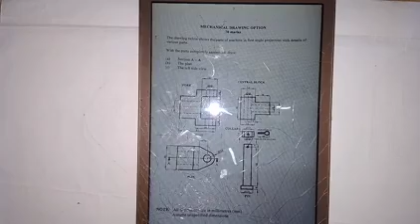As we are told, the drawing below shows the part of a machine in first angle projection with details of various parts. With the part completely assembled, draw question A the section AA, question B the plan, and question C the left side view.

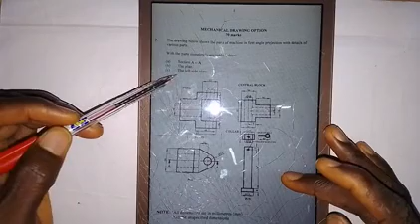So as we are told that these views are given in first angle projection, as indicated here also, this is the front elevation, this is the plan.

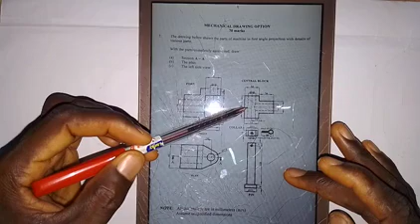Then we are going to take this part, which is called the central block, and put it here. Then we take this pin and insert it here to enter into this one and also enter into this. Then we are going to produce the sectional view, as we are told that we should produce section AA.

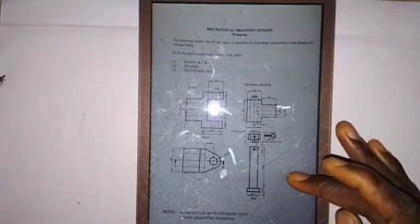So let's go and see how this can be done.

To draw section AA, what we are going to do first is draw a horizontal center line here, on this surface, going in this direction.

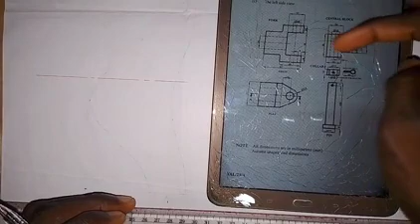Then we are going to be working on this. I need a set square. So we are going to draw this part first, then insert this in it, then put this one.

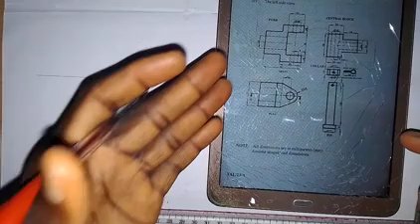Then, as it is a sectional view, there are some parts that we are going to reveal which are hidden in the given view. Because these are orthographic views, when we draw the sectional view, some part will be revealed, which we are going to see as we proceed.

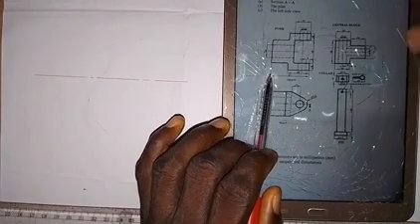Now we are going to draw this part, and then we have the distance from here to this end, which is 82 millimeters. So I will take that, 82, and then the total distance from here up, as we have here.

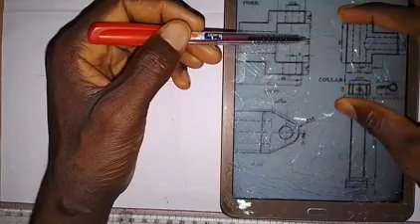So here we have 18, then here we have 58. So 58 and 18. That is what I'm going to do first.

So first I'm going to draw a vertical line at this point like this. Then I'm going to take a measurement of 87 millimeters from here.

So I'm going to draw a vertical line at this point. Having drawn the vertical line, the next thing that I'm going to do is take the 58 that we are given and divide it into 2.

So 58 divided by 2 gives us 29. I will take 29 millimeters up and 29 millimeters down. So this is 29 millimeters down, then I take 29 millimeters up, making it 58. So this is it.

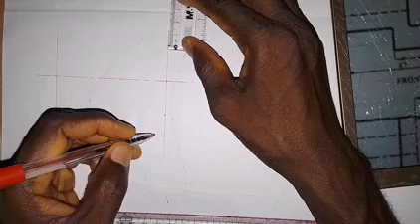Then the next thing I'm going to do is, from this point, take 18 millimeters down. So this is 18 millimeters here. Then I will also come up here, so I need to extend this line, then take 18 millimeters. So that's what we have there.

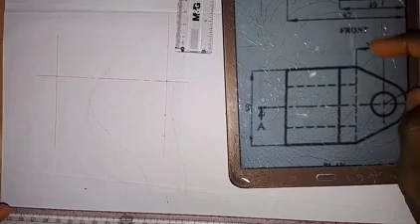Then for this part that we have here, I should be able to bring this out by the time I draw this part, because these lines are together, they are on the same line, so this will come out by the time I get this part. Let's go and see that.

So what I need to do now is draw a horizontal line here, and at this point also, I'm going to draw a horizontal line.

Okay, so it goes forward like this. Here also I will draw a horizontal line at this point, and then here I will also draw a horizontal line. So this goes forward like this. So then the next thing I'm going to do is...

As we have here, the distance from here to here is 49, so we take that 49 millimeters. So this is 49 millimeters. So I'm going to draw a vertical line through this point, like this. Okay, so we take it down like this. So that is what we have there.

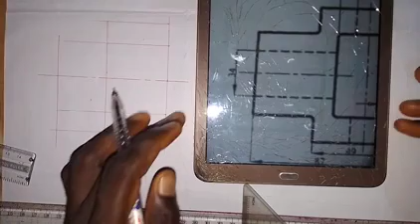So looking at what we have here, this part has come out now. So this is it here, it has come out. Then for this hole, within this part, we have that the diameter of this hole is 34 millimeters. So 34 divided by 2 will give us 17.

So from this center line, I will take 17 millimeters down, so this is 17. And 17 millimeters up to make it 34. So this is it. Okay, so I'm going to draw this line, like this. Okay, so I will also draw it. I'm supposed to draw it to this side, but let me leave it like that.

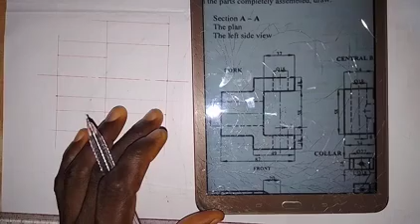So from what we have here, another thing that we have is the distance from here to here, which is 37. So to get this part, we have to take that 37. So from here, I will take 37 millimeters, so this is 37 millimeters here.

I'm going to draw a vertical line through this point. So this is 37 millimeters here. So then we have this, so we have produced this.

So what I need to do now is, we also have a hole here. This hole has a diameter of 18, as I can see here. So this is 18 millimeters diameter. So we have the hole here, and I need to get the center of that hole.

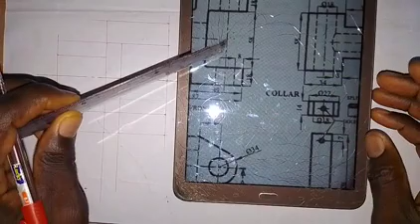For the hole, as we are given here, the distance of this point from this end is 8 millimeters. So I have to come to this point here and take 8 millimeters, so this is 8 millimeters. Then the diameter of the hole is 18, so I take 18 millimeters from here, so this is 18 millimeters.

So half of 18 is 9. To get the center line of that, I'm going to draw a vertical center line through this point first, like this.

Then I'm going to draw this line, and I will draw this line. Then I will come here and also produce this line, and also produce this line. So then this line that we have here has to get to this point. With what we have done here, we are bringing up the sectional view little by little.

Let me tick in the part that I need to tick here for you to see what we have done so far, while I pause the video.

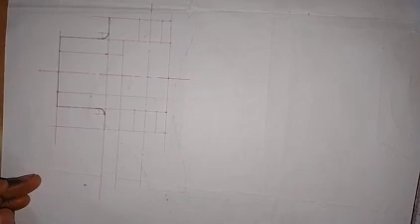Alright, we need to go on and insert the pin, and also put the collar. So we put it there, the pin and the collar, as we have here, we have to put them there. So with the split pin that we have here, let's do that.

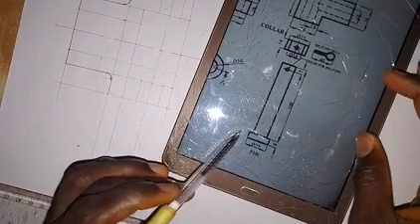For this pin, we have that the distance from this end to this end here is 108, and the distance from here to here is 8.

Then from here to here we have this to be 27 millimeters. So we have to do that, and we also have this being placed here, but let's draw this one first. So we are inserting it, but before that we also need to insert this part. That is the first thing. So we have to put this here.

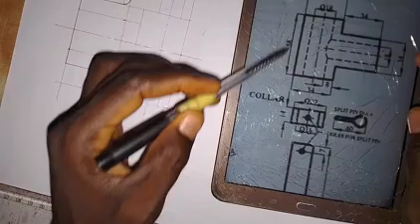Distance from here to here is 58, which we have already taken from here to here. So what you just need to do is produce this part, because our total distance from here to here is 34. So that is 34. We have to take 34. So from here, we take 34 first.

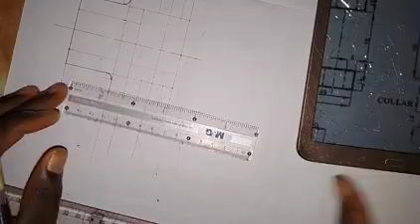So first of all, take 34 millimeters. So from this point, we are inserting it here. We need to take 34. It is from this end that we take 34 millimeters. So there's a space there. We take 34 from here, from this end. So this is 34 millimeters.

So here we are going to draw a vertical line here, like this.

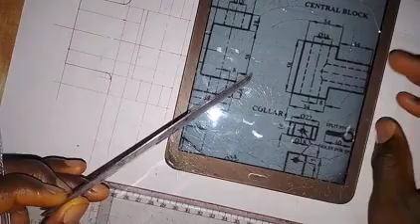Having drawn the vertical line, so then we are going to take - okay, so the length from here to this end is also 34. So I have to draw this.

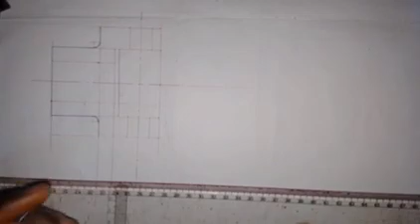I have to draw this horizontal line. I have to extend this horizontal line. So I extend this horizontal line. Having extended this horizontal line, I will take 34 millimeters from here. So this is 34 millimeters.

So then at this point we are going to draw the vertical line, here like this. Then what is the width? So it's also 34. I'm going to take 17 millimeters, which I've already done here. So this is also 34.

I can just extend this one to this side and then extend this one, so to meet this one. Okay, so we have this.

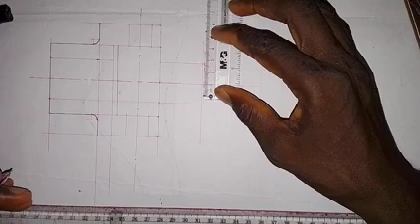Then there is a hole inside, with 18 millimeters diameter. So I will take 9 millimeters down, 9 millimeters down here, and 9 millimeters up here, making 18 millimeters. So here I'm going to draw this as horizontal line. I will also draw this as horizontal line. Okay, so this is what we have.

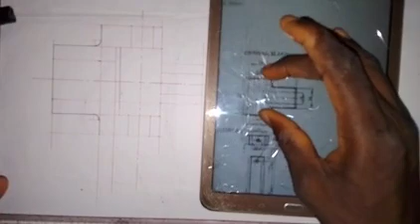So then we have inserted this part. We have inserted this part there. So now we need to put this one. We need to put the pin.

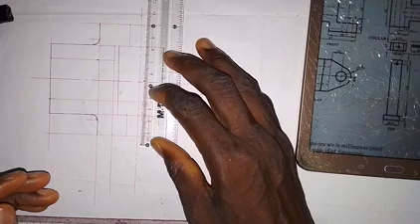So the length, first of all, have 8 millimeters. We are going to draw that here. That 8 millimeters we have taken, that is the thickness at this end. So 8 millimeters. Let's first of all do that. So this is 8 millimeters here.

Okay, so here we are going to draw a horizontal line here. So we have that. Then from this point here, we are going to take 108 millimeters. So 108 millimeters. So this is 108.

So I need to extend this center line a bit. So 108, we have it at this point. So this is 108. We have that. So then.

So we are going to extend this one, and we extend this also. Okay, so then what we have at this end.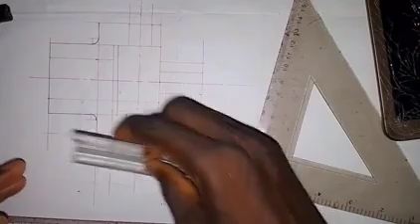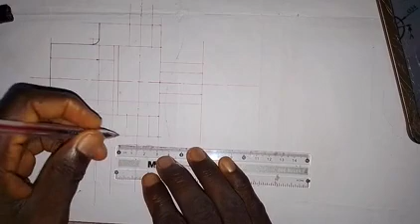So the width of the base of the pin is 27 millimeters, that's the diameter of that end. It is circular. So I'll just make it 28. That means I'll take 14 millimeters to the left side and 14 millimeters to the right side, making it 28 millimeters. So this is 28 millimeters here.

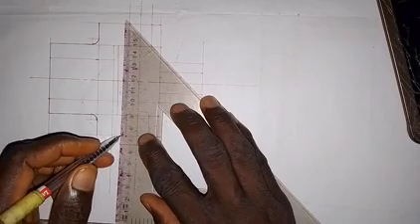Okay, so here now I'm going to draw a vertical line at this end, making it a thick line. Then I'll also draw it here, making it a thick line. And then I'll also draw this. We'll also make this line a thick line here.

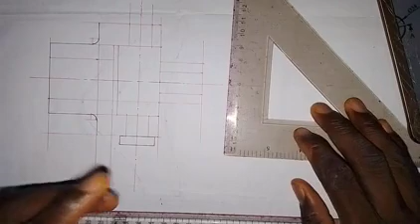Alright, so we have that. So for the collar, the wideness is 27. So I'll just come here and extend this line so it goes up here, and this one also goes up. Instead of 27, I made it 28.

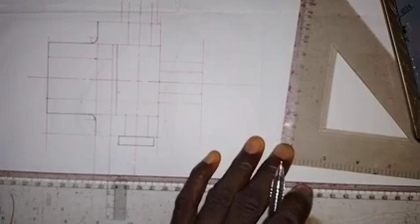Okay, and then the height is 14. The height is 14 millimeters. So here I will take 14 millimeters up. So this is 14 millimeters here. I take it here also, so that I can use my ruler to produce that. So this is it.

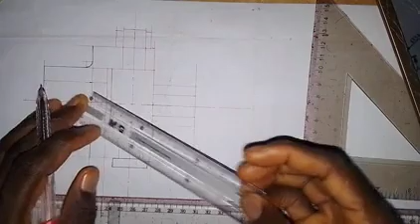Okay, so this is the end of the pin. So we need to draw this line. Okay, so we have that. So this line, now we are going to see this part of the bolt. So we see it all through to this point, and then we see this all through to this point here.

Okay, all right. So another thing that we have here is the hole. There is a hole in the pin, whose center from this end is 7 millimeters. This is it, 7 millimeters. We also need to show that hole, and we are told that for that hole, the diameter is 4. Diameter is 4.

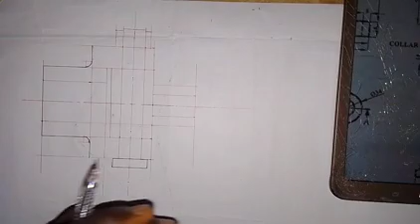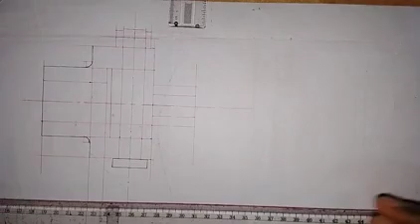So first of all, take a measurement of 7 millimeters down from this point on the pin. So we take 7 millimeters down. Okay, so this is 7 millimeters. So we draw a center line here. Okay, so I'll just use my hand to produce that. It is very small, that is 4 millimeters in diameter. So I'll just leave it like that.

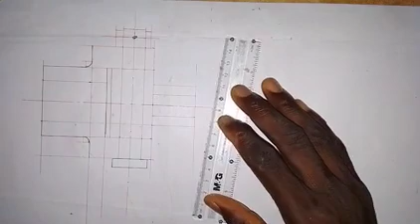So what we need to do now is to bring out the part that we can see. So for this one, this will be a thick line from here to here. Then this is going to be a thick line. We are going to see this as a thick line, from here down here. So we also see this as a thick line from here down to this point.

Okay. So we also make this a thick line from here to here. This will also be a thick line. The part that we are going to hatch, we are going to see it together. So this will be a thick line and this will be a thick line. So let me pause the video and do that, and when I'm done, I will come and show you the next thing that we are to do.

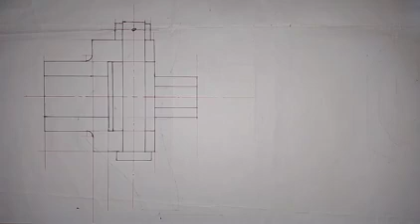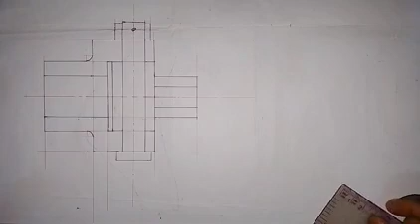So now, having assembled the part together, the next thing that we are going to do is to hatch the part that we are going to see hatched, the solid part. So this is solid part, all to here. And for this one, we have this to be solid part. And don't forget that we have different components that we assemble together. We are not going to hatch this pin. We are not hatching it.

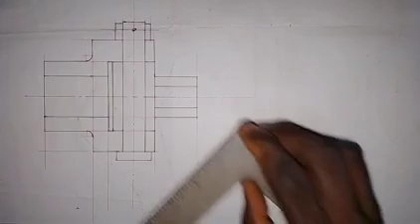Then this one we are not going to hatch. This is just a plain surface. We are not hatching it, but we are hatching this part, this, and this. This is just one component, so we need to hatch them in the same direction. While this one we need to hatch in a different direction. Also this we need to hatch in different directions. So let's see it together. For this one, I'm starting by this. I'm going to do my hatching in this direction. So it goes like this.

Okay. So let me do that while I pause the video because of time. Hatching lines are drawn with a thin continuous line, and they are equally spaced and they should be parallel to each other. So that's what we need to bear in mind. Okay. So I'll do that while I pause the video, and when I'm done, you will see the final result.